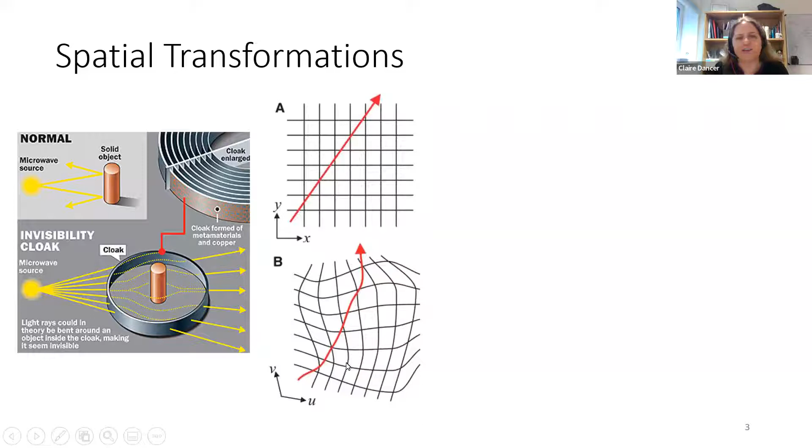When I started on the Quest project originally, I was quite influenced by reading these papers by Yang Hao's group in Queen Mary, thinking about what that meant for how we make metamaterials. This picture on the left is a designed cloak, and you can see what it's supposed to be. It's like a metal wedge, and you change the properties of the material above it so you can hide that metal wedge.

The initial design of this material has a change in permittivity from 5 to 1, more or less continually graded, and it's really quite difficult to make. So they went through a process of downsampling to see what effect making the material more straightforward to manufacture would be.

They ended up with a design which had permittivity between 2 and 1, which is a little easier to realize, but with a continual gradient. So you downsample again and say, okay, we'll make these blocks as very coarse blocks, and say they just have to have these particular properties between 2 and 1.

And then in this later paper, they actually made that. This is a polyurethane foam—the sort of thing you can literally go and buy in B&Q and use as insulation, heat insulation or noise insulation. It's a 2-part mixture; you mix it up and you get your polyurethane foam.

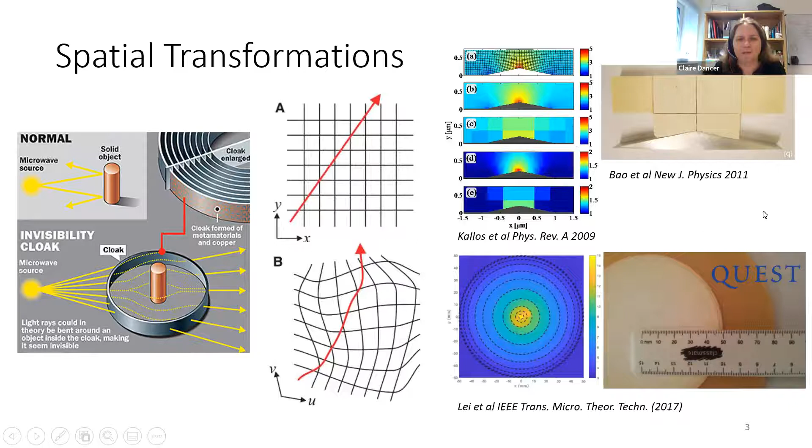With that in mind, when I started thinking about what I was going to say in this colloquium, I wanted to think about how we can relate what we know about metamaterials to what we already know about materials. It's very important to think about where metamaterials get their properties from, but also where materials get their properties from. Whenever we talk about metamaterials, we try to define them and say, this is what a metamaterial is.

We say it's beyond materials, beyond conventional materials—not good enough, we'll go beyond those material properties. We use this definition, which I think is currently on our website: they're materials which are fabricated structural elements that give them properties not found in nature. As Anya and Alistair know, I debate this definition, and I want to discuss what it really means from a materials perspective.

But whatever we end up coming around to, we talk about these structural elements. I often use this picture from Pendry's paper in 2004, because it's a really nice illustration. It basically says a conventional material gets its properties from its atoms, and a metamaterial gets its properties from its meta-atoms, or structural elements. In this case, they've drawn out some split ring resonators, and that's a really simple way to explain things.

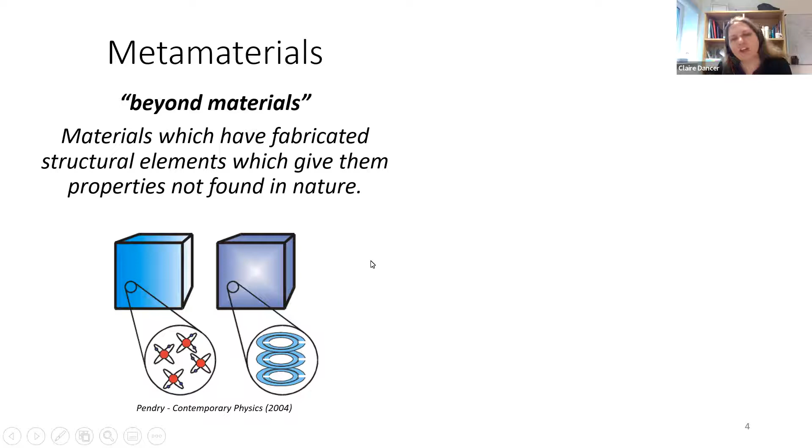It's a really nice way to explain things, but the problem I have with it as a materials engineer is that it's just not really quite true, because materials don't just get their properties from their atoms. There's a lot of factors that go into what gives a material a particular property, and that has an impact when we think about metamaterials as well.

For those of you who did an engineering degree, this is probably quite a familiar drawing. For everyone else, this may well just be like, okay, what's that? This is something called a material selection diagram, or an Ashby plot, depending on whether you want to name it after the person who used a lot of them in the textbook. This plots out properties of materials against each other, and it's designed as a tool to allow engineers to choose the right material for the application.

Most of them are mechanically inclined because of where they sort of came from. This one is fracture strength, so the strength when the material actually breaks, against the density. What you see here is large regions for different large categories of materials. So we have foams, ceramics, metals, and smaller bubbles that represent certain types of materials in there. You can see there's some specifically named materials, and some which are more classes, like wood.

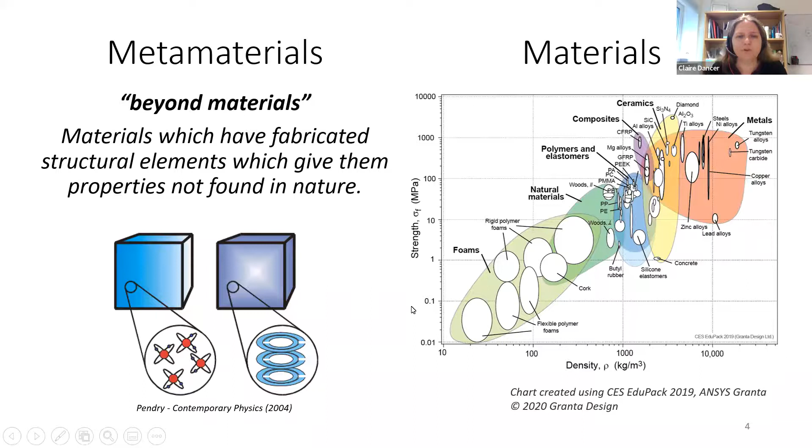What you generally take from this picture is an idea that if you want a high fracture strength, you have to accept a high density, because everything's going from the lower left up to the upper right. And this is kind of where we feel like we get our properties from. But you'll notice that the regions where you have the properties of the materials are quite large, and that's because we actually do have more control over material properties than is thought if you just think about the atoms.

So where do material properties come from? Well, they do come from what atoms are in the material—there's no getting away from that, it does affect what it has, but it's not the only factor. The second important factor, beyond the atoms themselves, is the way those materials are actually bonded together. And this gives rise to a lot of the material properties in terms of mechanical properties, the stiffness of the bonds and the nature of the bonds.

We classically divide up our materials into different categories, and we divide our bonding into different categories as well: covalent bonding, ionic bonding, metallic bonding, and van der Waals bonding. You can see in this diagram, taken out of a materials engineering textbook, roughly where these classes of materials sit. Metallic materials tend to sit in this corner where they're mostly metallic bonding. Semiconductors tend to be very strongly covalent. Ceramics and glasses actually sit between and have a mixed ionic covalent character, something that's not always acknowledged when we talk about their mechanical properties.

And polymers tend to be a sort of mixture of covalent and van der Waals bonding, depending on which interaction you're looking at within the structure. The difference that the bonding makes to the materials is to do with how strongly attracted to each other those atoms are. So it's not just which atom they are, it's also how they're attached to each other.

If you have a material with a strongly covalent or ionic nature, the bonding is particularly strong, and that gives rise in ceramics to the classic brittle fracture behavior we see in basically all ceramic materials. It's fundamental to the nature of those materials, because when you put those elements together, those are the kind of bonds they form. When we put metallic materials together, the electrons dissociate and we do not have that sort of strong bonding, and that equally has an effect on the mechanical properties—it means you can actually deform the material quite considerably without fracturing it, and that's really directly where that nature comes from.

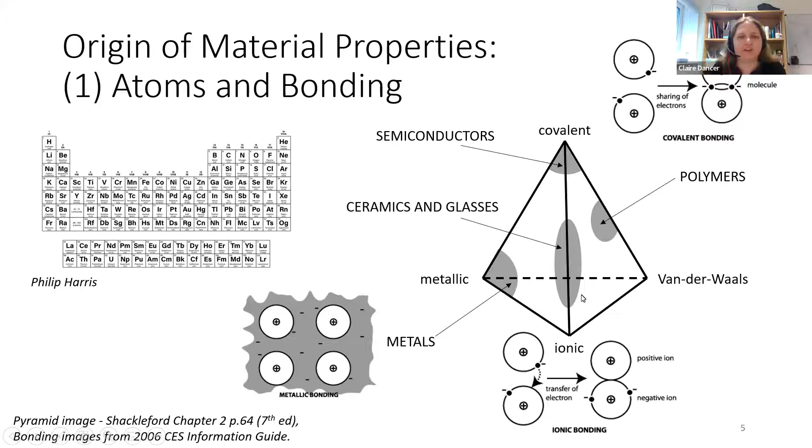So if you talk to, say, a materials chemist, this is where they tend to sit—they think about bonding, they think about atoms, they think about the composition of the material. The second place where the origin of material properties comes through is the level that I always think of as being the material scientist's level: microstructure. Microstructure is incredibly important, and actually I think it's a place where we have probably the most control over the end material properties, if we're confined to a given chemistry or a class of chemistry.

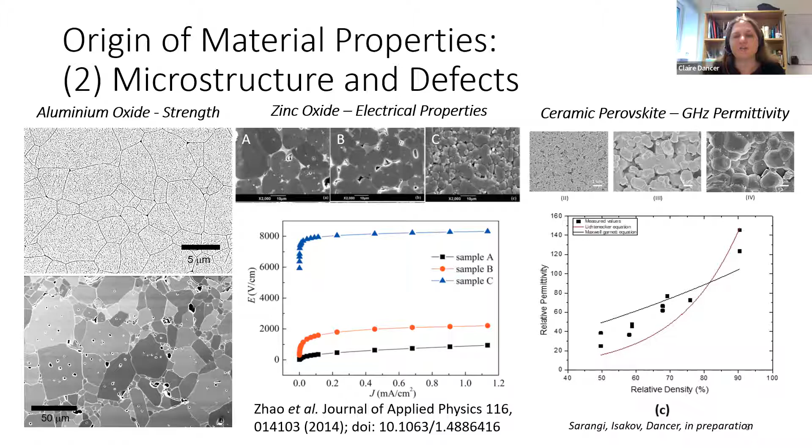The third origin of materials properties category is to do with the processing. This is kind of different from microstructure because it reflects the fact that you don't necessarily have the same degree of choice about how you process the material. Two particular examples I wanted to express are texturing and orientation effects in processing techniques, and the second is residual stress, which is on the next slide.

First, talking about texture and orientation. Classically this would be texturing if we're talking about polycrystalline materials like ceramics or metals, where we have a preferential crystallographic orientation in the material. We'd talk more about orientation when discussing polymers.

If you extrude a polymer - and whenever I talk about extrusion, I always say it's like making pasta, or squeezing Play-Doh through the Play-Doh toy - we're basically pushing a material through a die to make different shapes. You can make a tube, a filament for 3D printing (this is often how they're made), or sheets and films. The act of pushing that through, or having it pulled off by haul-off rollers, gives a degree of tension in the material as it comes out, and that can create orientation effects in the polymer chains as you pull it through, which can affect what we see in practice.

The second place where we see texture and orientation is typically in structures like these. This paper is quite interesting - it's on detecting preferential orientation using X-ray diffraction. It's a nice paper if you're looking for a starter guide on that kind of thing. It basically shows that depending on the type of particles we're dealing with, if we're depositing thin films, we can get a strong degree of preferential crystallographic texture, and that can be detected by XRD.

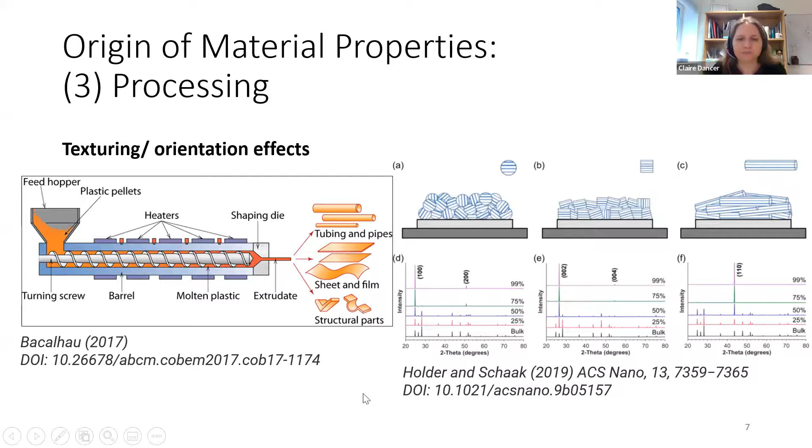The second aspect I briefly mentioned was the induction of residual stresses in materials. This is a particular problem in ceramics - I'll talk about it a bit later in the talk as well, since it's an active research area in my group. But this is a situation where it's actually useful. Some of you might know about yttria stabilized zirconia, a material with very strong interest developed in the 1990s. It's a way of making an oxide ceramic tougher through a particularly interesting mechanism involving residual stress.

Zirconia at room temperature in its stable crystallographic form is monoclinic; at high temperatures, it's tetragonal. It was found that if you add a small amount of yttrium oxide to the zirconium oxide, you can stabilize that tetragonal phase at room temperature - not everywhere in the material, but enough to get a degree of the tetragonal phase in the structure. What was observed in the 90s - this isn't the original paper, just a nice diagram to show what's going on...

...is that if you had a crack in that material, perhaps put in deliberately with a hardness indenter, and allowed that crack to move through, a change happened at the crack tip. The energy released by the cracking causes a transformation of the tetragonal phase to the monoclinic phase. These crystal structures aren't that different, but different enough that you see a significant volume expansion at the crack tip. That difference in crystal volume gives rise to a compressive stress around the crack tip, which acts to push the crack back together.

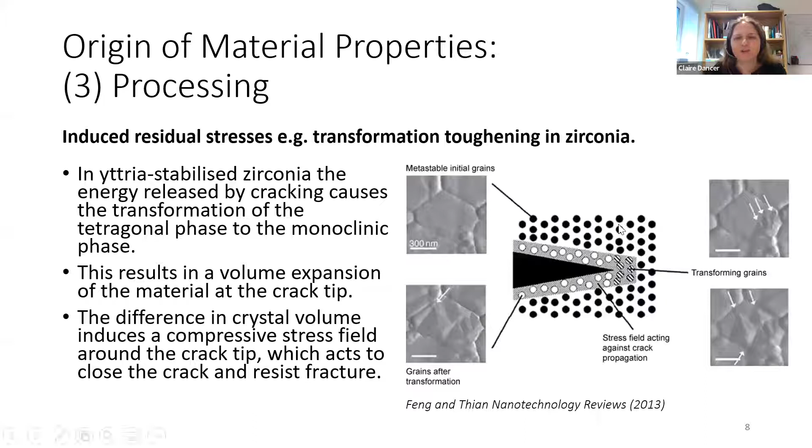So if we come back to thinking about what properties materials have and how they come to be plotted in these areas on this graph, I think the things I've talked about explain why, when we look at a given material on one of these plots, what we're really seeing is a region of properties. If we take something like silicon carbide, this is the bubble for it, and it actually spans quite a range of fracture strengths. That's due to its microstructure, its processing, its exact composition and bonding type. Some materials have less of that variation and some have more, but they all sit in a range.

When we think about metamaterials and what they do for us, what they're actually doing is something really interesting, because you have this added degree of freedom. That allows you to say, well, I don't want a material that's really, really high density, but I need it to be this strong - so why can't I have a material here? You might design a mechanical mesh material which has a low density because you've made it through a structural form with lots of spaces within the structure. So it's actually low density overall - it's a lightweighting material - but you've engineered it so you attain a fracture strength of a material that should be much, much denser.

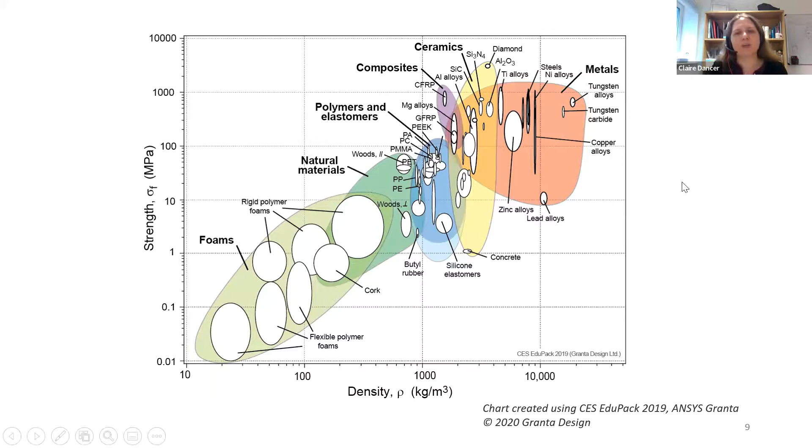But I think it would be a mistake not to say that metamaterials get their properties from the three origins I've already talked about - it's just that we're adding on an extra one. So what do these additional properties, the structural elements, give us?

Now, this is a nice excuse for me to put up my absolute favorite metamaterial. This is, believe it or not, a ceramic material that can deform completely. It's from Julia Greer's group - they 3D printed this ceramic and it can deform and recover its shape completely, which is just ridiculous if you work on ceramics, because they don't normally do that, so it's very interesting. This is one way to manufacture them - these elements have been 3D printed, an additive manufacturing method, but you can also make them by subtractive or formative manufacturing methods. In some cases, you don't actually get something that looks that different to a conventional material.

I think it's important that we bear in mind, when we're talking about metamaterials and what they look like and what they are, that there has to be an element of structure in, an element of artificial control over the placement of the features, over where they're sitting in the structure, and over the fact that we have made them do that. It's not just that it happens to be like that. That's more like a natural conventional composite.

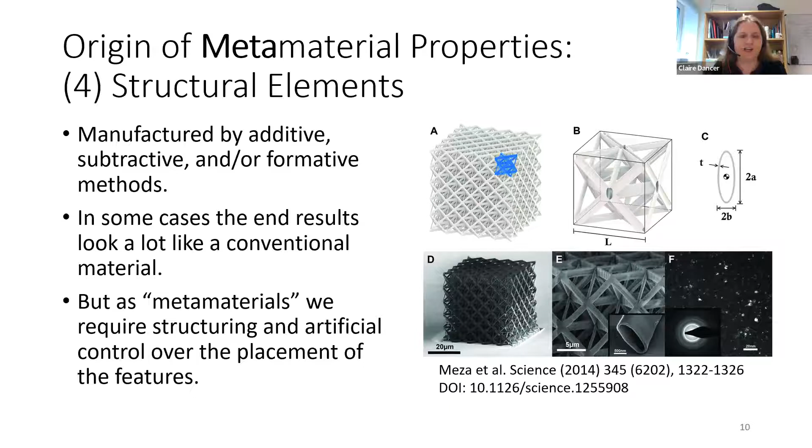So manufacturing metamaterials, what are we trying to make? Well, the additive kind of features, I think, are things like a split ring resonator - little pieces of metal, very carefully designed. You're looking at the dimensions, the spacing, the gaps, the materials you're using. You calculate all of that, then you deposit it and make these very nice structures, assembling them into nice arrays. That's an additive feature because you're only ever adding, never taking away, and it's all made in situ.

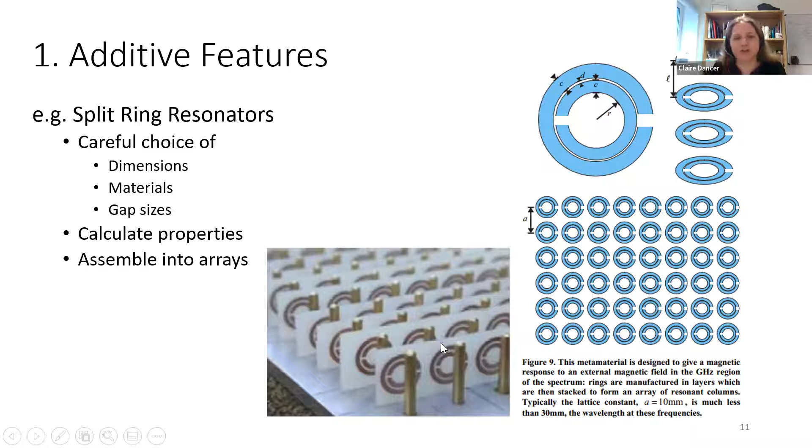It tends to be quite a sequential process. So you have your material, then you deposit something else on top. There are multi-steps involved when we do this kind of work.

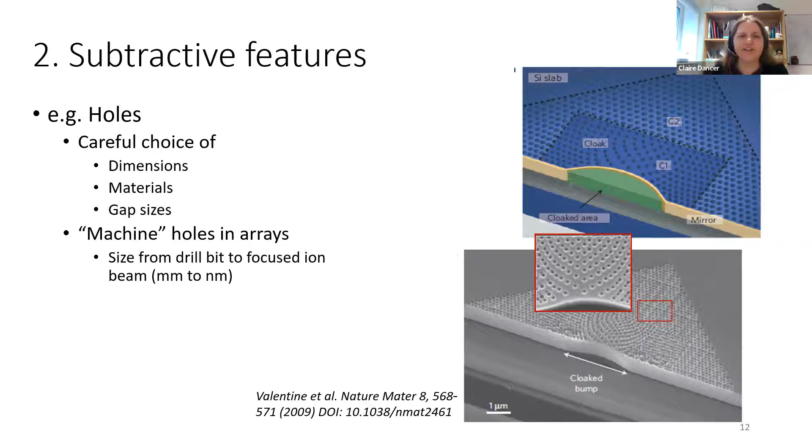I find this very interesting because some of these holes are off position, some are merging into each other - it's very interesting to see a real metamaterial like this where there are obviously some problems, but it's nonetheless working. That's an example of drilling holes with a focused ion beam on a nanometer scale. You could equally think of these being drilled with a drill bit or a larger scale device - it's the same kind of technology and how we work on these things.

The third one, and the one where I probably sit most of the time, to be honest, is looking at formative features - manufacturing techniques which give us ways to make materials in a formative way. So we're making the whole thing as one body, in a form which is a robust structure all attached to each other.

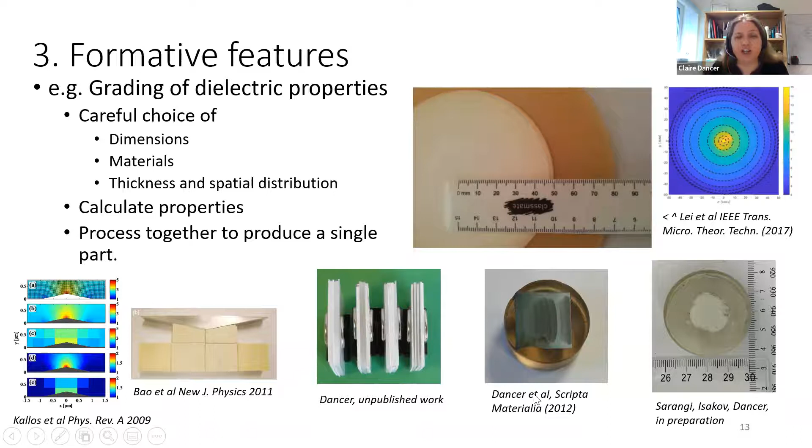In this case, we're looking at things like grading dielectric properties, calculating the properties that we need. The thickness can be very important, as well as the actual values of the materials. You can see here various examples we've done in the group over the years, and here's Yang's one from before as well, looking at different ways we can process these materials together.

Okay, so hopefully that brief foray through the origin of properties has convinced you there are four origins of metamaterial properties. It is not all about the structural elements - it's also about the actual material properties, the atoms, the microstructure, and the processing route we take. If we're going to manufacture metamaterials and really push some of these technologies through, we need to be aware of the effects of all of these things and really work on them.

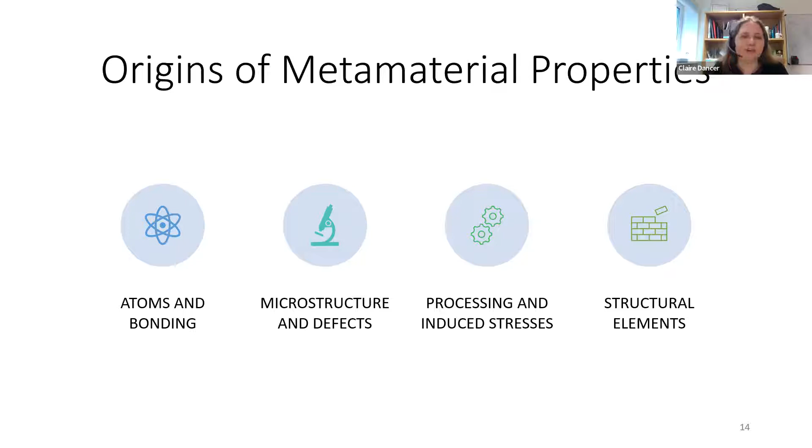But in many ways, it's actually a natural progression from what we work on as materials engineers, as people who make things - these are the sort of things we're used to dealing with. So the question occurs to me that I don't actually know that many people who are actively working on this. I certainly don't work on it all the time. Most of my group are working on other things - it's not an easy thing to work on.

So we work on other things which are somewhat closer to being easily worked on. In the second half of the talk, I want to talk about what some of the problems are with manufacturing metamaterials, and suggest a few ways we could find more common ground between the metamaterials community and the manufacturing community.

Number one, a big problem that we've found, which Abhijit, my PhD student, has been working on, is that we don't always know what the material properties are. They vary quite considerably with microstructure when we put them into composites. It's not as simple as asking someone, do you have a material with this property? I've been asked that a few times, like, do you know a material with this electromagnetic property, a value of this one? It's a really difficult thing to answer.

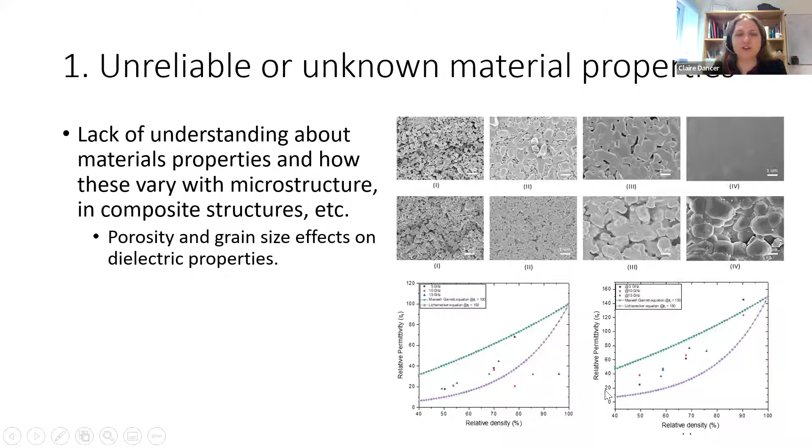A manufacturer might hand you a data sheet, but then you're confined to buying something from them, not to making what you need. We know from measurements in our group that if you change the porosity of a material, you get quite significant differences. So if you change your process temperature and affect your ceramic microstructure, you'll see quite a radical difference in the dielectric properties. We could be talking about going from 20 to more like 100 in permittivity. That's a significant effect.

So that's the first one. The second aspect has to do with changes in material properties because you're mixing them together. The particular thing we see in polymer ceramic composites is that adding the ceramic makes the polymer crystallize, and a crystalline polymer doesn't have the same properties as the amorphous polymer.

It's really tempting, and I'm guilty of this myself, to think of a polymer as a sort of sticky gloop that sticks everything together and doesn't do anything. But it does do things, and it does have an effect. Given that crystallization preferentially occurs at the surface between the ceramic particle and the polymer interface, you're actually placing a barrier between those two particles, which is different from either of the composite materials you might be considering when thinking about material properties.

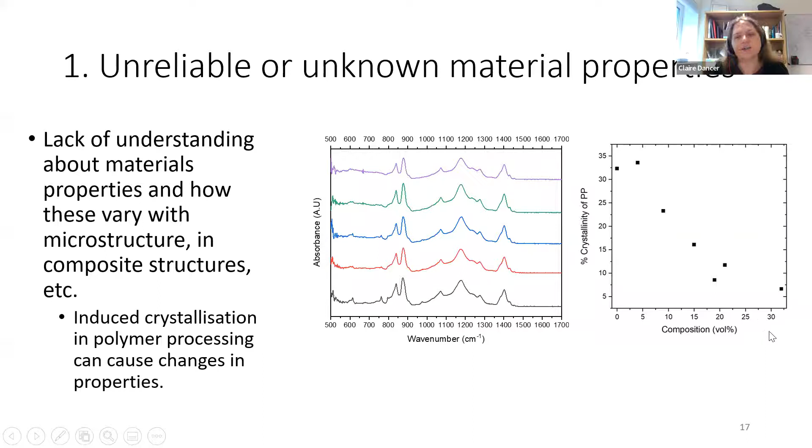For example, this is FTIR on PVDF with added ceramics. We're finding we change the crystallization, getting a lot more beta phase PVDF, and it affects our properties. In this case, we're looking at crystallinity of polypropylene, which actually seems to go down as we add more barium titanate to the material, changing the properties again. It's an interesting effect we see in some of these materials.

That can also have an impact in a related area, where we encounter difficulties because we reach a maximum value at which we can add things. Sometimes that's due to all the additions in the material joining up together in something called percolation, where you form a connected network of all the particles sitting next to each other, and that changes the properties of the material.

Sometimes it's just because there are all sorts of interactions between the materials, and they can't mix enough to interact in that way. In practice, we find a really strong limit to how much ceramic powder you can put into a polymer and still make it into a printable filament or an extrudable sheet. We found different values for different materials - it's not a universal law. It seems to be about 30 volume percent for most things, but you can push it higher.

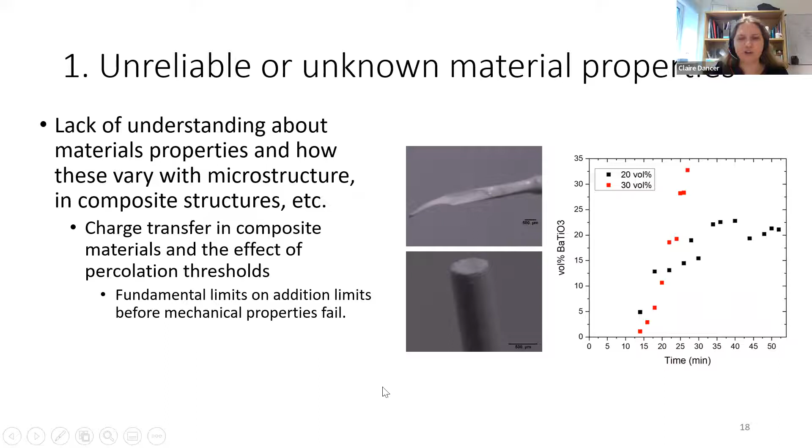We've pushed it higher, and we've also found it come out lower, depending on the degree of mixing we've had. It can really quite radically change the material. These are tensile tests on some 3D printer filament we made with barium titanate particles inside it. You've got a stretchy, plasticky kind of structure until suddenly you don't, and you have a brittle one, which you then can't print with because it's too brittle to feed through the printer. So this can make a really quite big effect on what we see.

And the final one, and I think perhaps my first call for some assistance on this - one of the things we struggle with as manufacturing people is that it's very difficult for us to measure the properties of the materials we're making. The techniques we have typically use a VNA, and we either do waveguide measurements or use this coaxial line that we can place samples in, or we do a resonant method, which is what we tend to do here. But all of them have massive sample preparation challenges.

I don't know whether this is fundamental, but it's certainly something I'd love to talk to people more about: are there any easier ways we could measure some of the properties of these materials to just know if we've got the right values in a reasonably simple way?

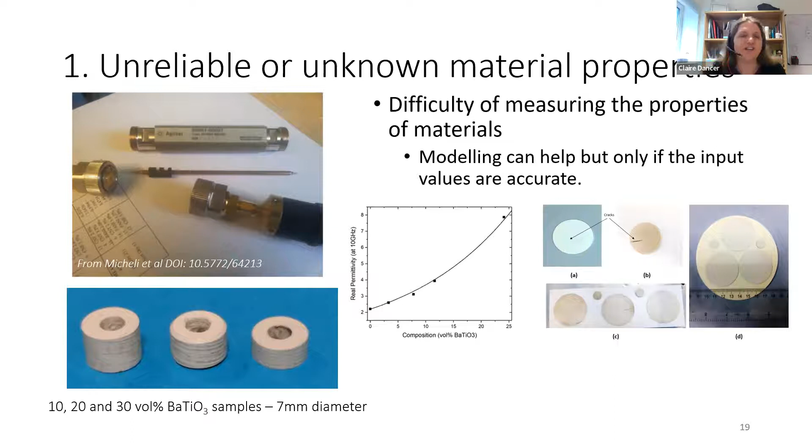So the second area where we've encountered difficulties, and it's not confined to metamaterials, it's a pretty universal problem, is that if you're trying to co-process materials of different properties, it makes processing very, very difficult. So if you're thinking about processing something that contains a metal component and a ceramic component, if you want to do that at scale, you probably want to process it in a minimal number of steps and preferably do everything at once. So what do you compromise on?

And we have the same problem in solid state batteries. A lot of my group works on solid state batteries because obviously it's a well-funded area. In that, we have the same problem where we're thinking about how do we process a solid state battery in one go and get a dense ceramic with the properties we need. So we typically say, well, we can't do much about the metal - let's look at the ceramic, and we look at low temperature ceramic processing techniques.

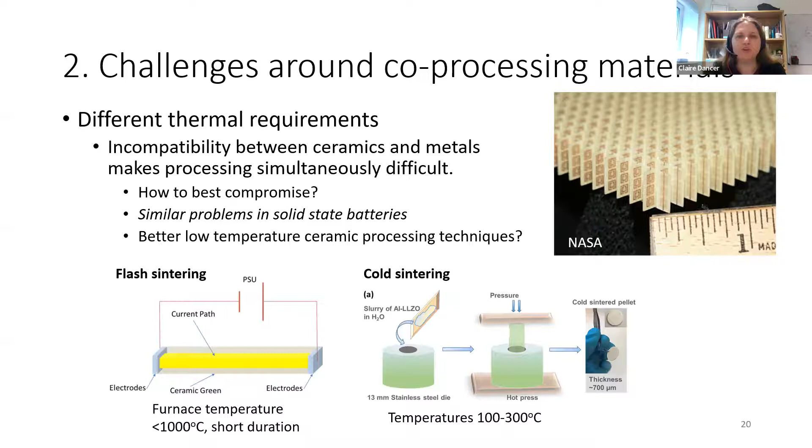Another challenge with co-processing materials has to do with thermally induced residual stresses. If you make a material containing components with quite different coefficients of thermal expansion, you find that at the processing temperature it's all fine, but when you cool it down, those differences in thermal expansion can pull the sample apart.

I went through six months of basically pulling broken pieces of material out of the furnace. Then we took a step back and looked at what's going on with the residual stress, and found that you can mitigate some of it by taking a graded layering approach to the material, gradually changing those properties in one direction.

This is work I did actually before I even started on metamaterials, so it's related but not the same. We can do modeling work and actually measure the residual stresses, finding ways to keep them below the level at which the material will crack and pull itself apart.

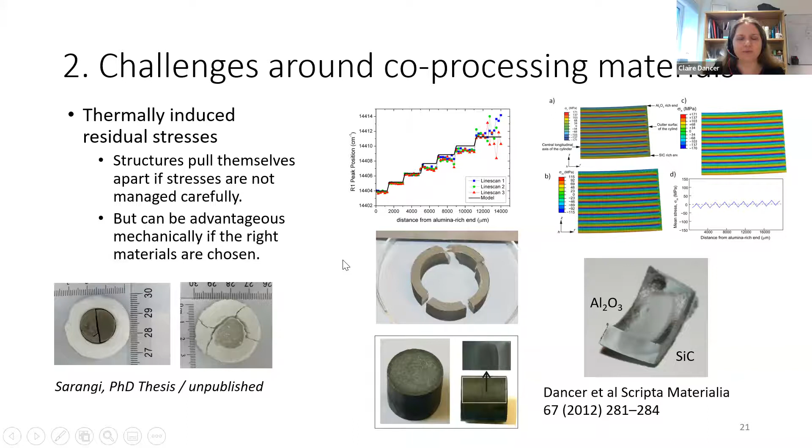The third challenge around co-processing materials is to do with continual change. A lot of the designs I see for metamaterials have some degree of continuous change in properties, and those can be really hard for us to actually make. So we normally resort to discrete layers, trying to know when that's going to be okay. We still want to develop continuous changes in properties, but it really isn't very easy.

Discrete layers are significantly easier to make, but these interface effects—we don't really know how much of an effect they're going to have. And the porosity effects we get in materials often lead to reductions in their allowable effective values.

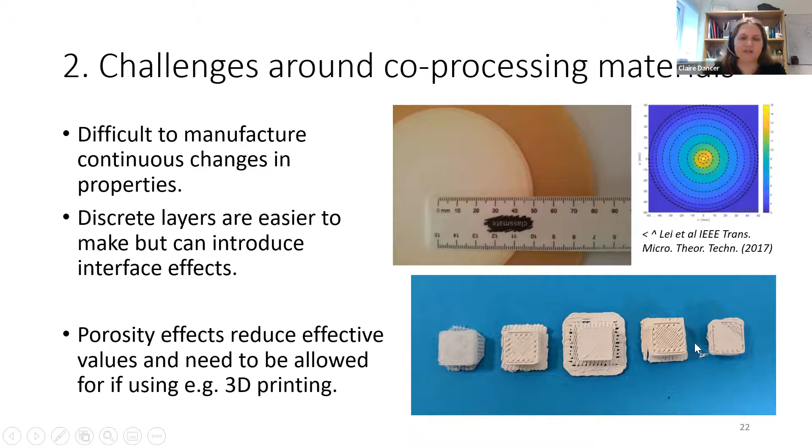So if you're doing something like 3D printing—these are some 3D printed ceramic composites—you get a lot of porosity. And unless you're going to do a lot of post-processing, which probably eliminates the reason you were doing the 3D printing in the first place, you need to think of these materials as actually containing quite a lot of air in that structure.

The final place where I struggle, particularly when thinking about metamaterials projects, especially where we're not working directly with a metamaterials group, is about what happens if it isn't perfect. You see this perfect design and think, well, it's really hard to make—I don't know if I can make that. But is there any point making it if it's not going to be perfect? Sometimes you just can't make it the way it's supposed to be made.

As manufacturers, we don't really know what's critical for the intended application, and we don't normally have the ability to test these things as we go along. So if we're making something designed to be a certain type of lens or surface, we're reliant on other people testing it. That really means projects have to be much, much more integrated together.

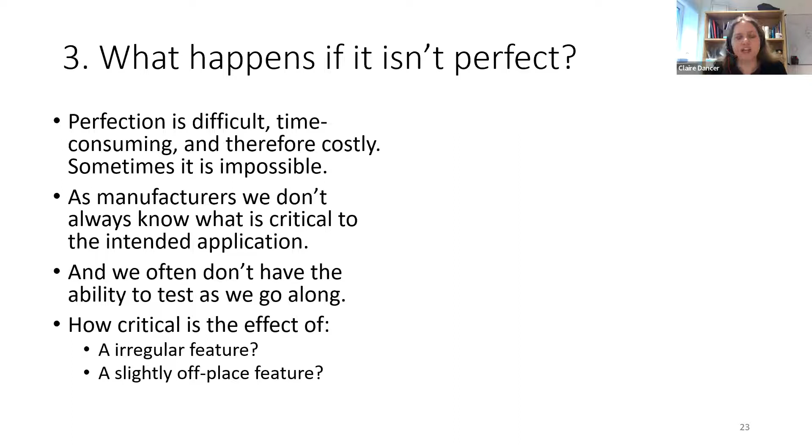This is entirely what I would expect you to get, because you've got a certain degree of drift—you get some movement while doing the focused ion beam work and removing the material. You get some inconsistencies in the shapes of these holes. My question is: how much is that acceptable? How much of this is okay?

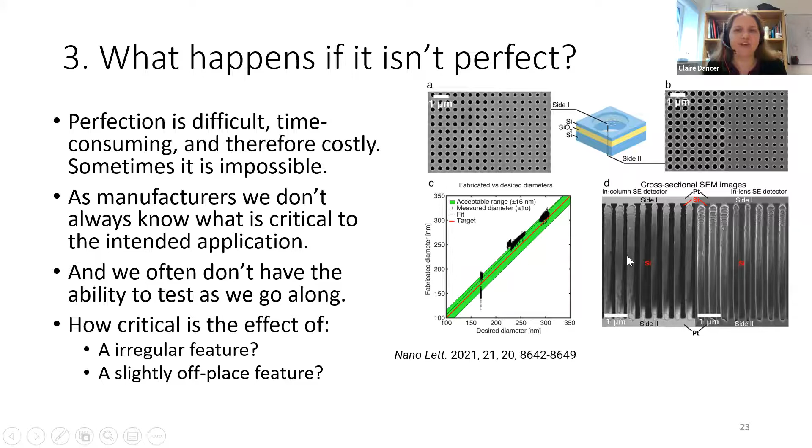My question, if I'm making this and saying okay, is this good enough, is, does it matter? Does it actually matter? In this case, they'd actually done that work and showed whether it matters. You can see that the designed line and the measured line are not that far apart. There really isn't that much difference. This is probably good enough for what we need, and it's really very close together.

But there is no way I would be able to do that testing in my lab. It has to be done by working together. And that's where one of the problems comes up, I think, with some of these projects, is that we step through a process of design, manufacture, test, and we never circle back to go through that process again. And it's often because there's not enough time. That can be a real challenge.

So let me propose some solutions in the last couple of minutes, because I want to give a little bit of time for questions. One of the solutions is looking at materials available and hopefully moving beyond what can be bought from known suppliers who will tell you this is what's on the data sheet, which isn't actually the case in a lot of cases.

Expanding those materials and having some kind of way of actually recording the properties of these materials in a centrally accessible database, which actually reflect the material properties, not just the materials chemistry, but the microstructure and the processing conditions as well.

I think we need to reach out to the manufacturing community about metamaterials, and I think the network is starting to do that, drawing people in and into those discussions with metamaterial designers, because metamaterials actually need all of the materials out there. This isn't a job for ceramics people only. It's not a job for the metal specialists only. It's a job for everybody.

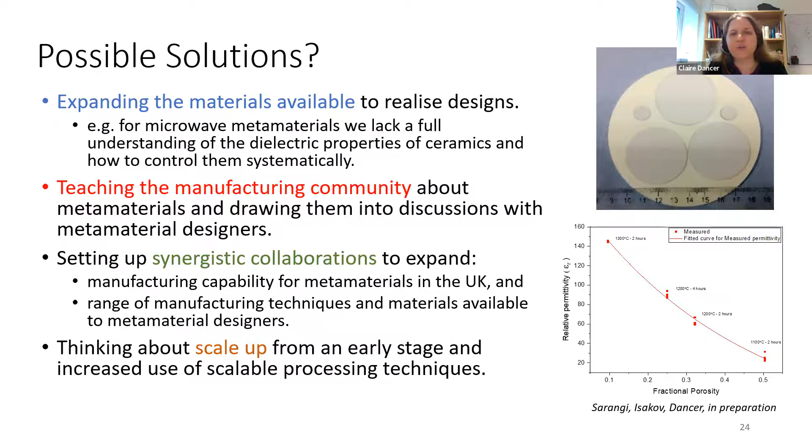I think we need more synergistic collaborations between people. We need more manufacturing capability and a greater range of manufacturing techniques and materials available to people designing metamaterials. And we need to think about scale up from an early stage.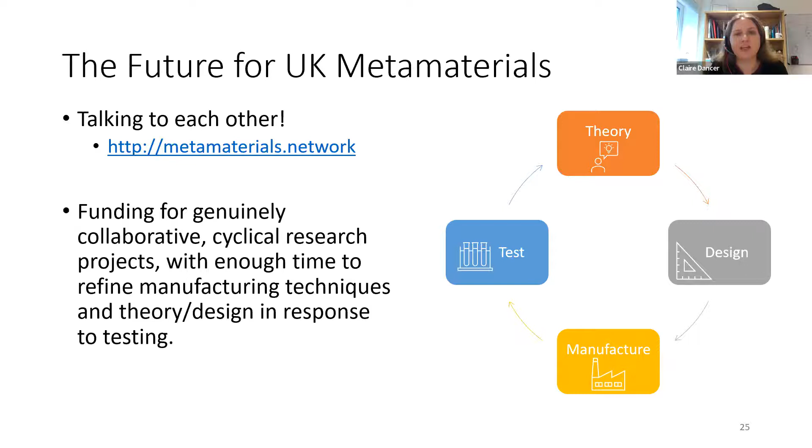So hopefully the future for UK Metamaterials is talking to each other and funding cyclical research projects, which give enough time to move around the circle of theory, design, manufacture, test, and go back again in response to testing, because I think that is the way we need to design projects as we move into more collaborative times.

And a final plea for some awareness and willingness on both sides. I think manufacturers need to be willing to compromise on some aspects of manufacturing to meet those metamaterial requirements. These are really challenging materials to make, and you have to be willing to say, well, okay, I have to accept that it's not going to be as strong as I might want it to be. I have to accept that it's not going to be done in the way I want it to be done.

And for metamaterials and application specialists, I think awareness of those manufacturing limitations, and awareness that there probably isn't a bespoke method out there waiting for you to find it. It needs to be worked on and adapted to overcome some of these challenges.

So at that point, I would like to thank you very much for your attention.